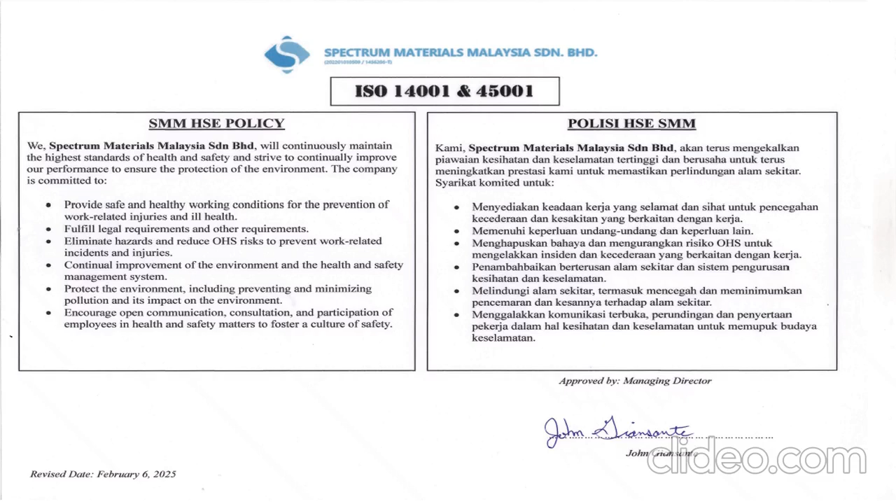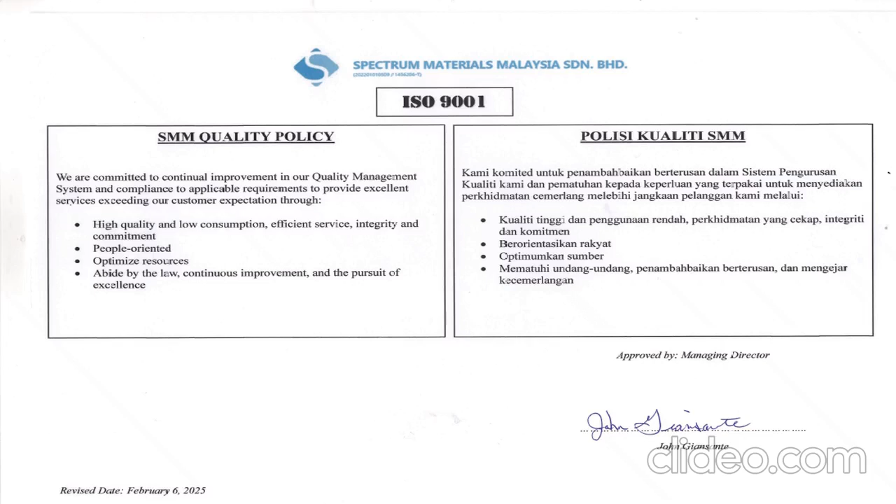Spectrum Materials Malaysia Quality Policy. At SMM, we also strive to ensure all our activities are in line with quality policy. SMM commits to secure a quality system that meets customer requirements and expectations. This is to ensure all our products and services meet stringent quality and safety requirements.

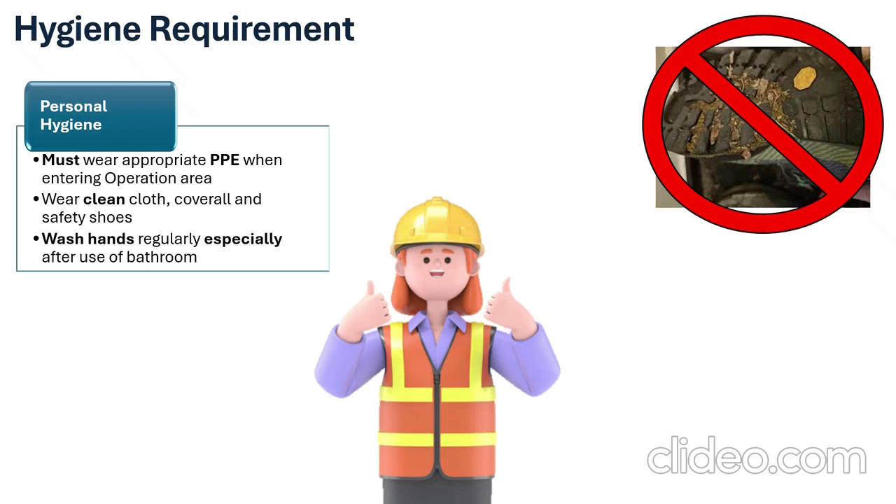Hygiene requirement. Personal hygiene. Must wear appropriate PPE when entering the operation area. Wear clean clothes, coveralls, and safety shoes. Wash hands regularly, especially after use of the bathroom.

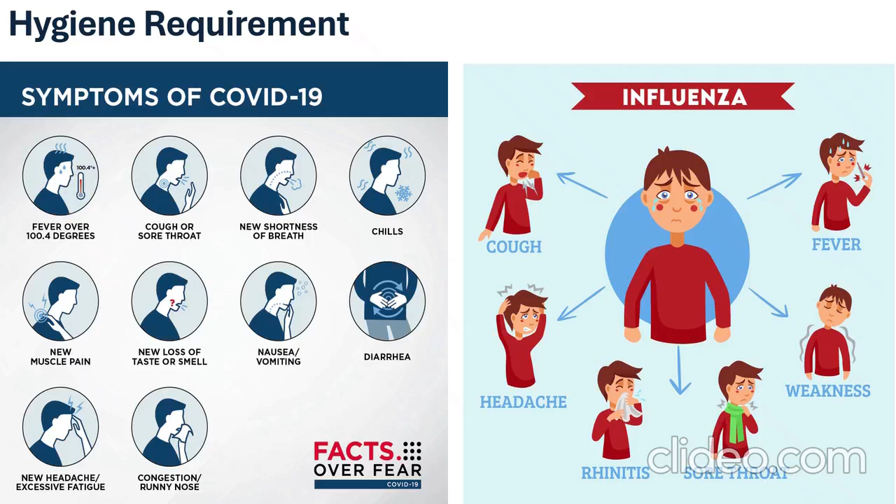Personal health. Please inform the SMM management team if you are suspected of being infected with an infectious or transmissible disease. At SMM, no food and drink are allowed, except drinking water, in operation areas.

No smoking and vaping except in designated areas. No spitting except at appropriate areas. Do not litter. At SMM, we divide our waste into two categories: domestic waste and scheduled waste.

All domestic waste can be thrown away in the regular trash can. However, garbage under scheduled waste control must be thrown away in a special trash can, or inform your host to throw away garbage under scheduled waste.

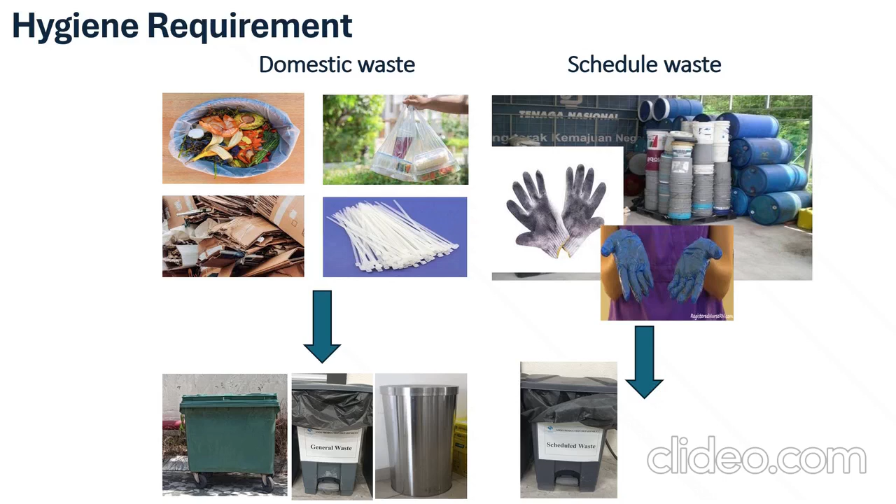Gate pass must be used for company assets. Get signature from SMM managers. Hand over the gate pass to a security officer prior to exit.

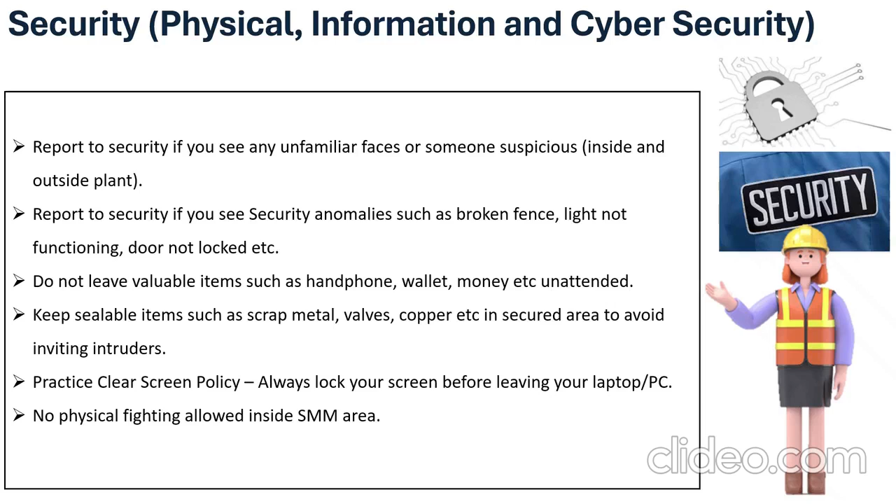Spectrum Materials Malaysia Factory Safety Rules. Security: all contractors and visitors must register at the main guardhouse.

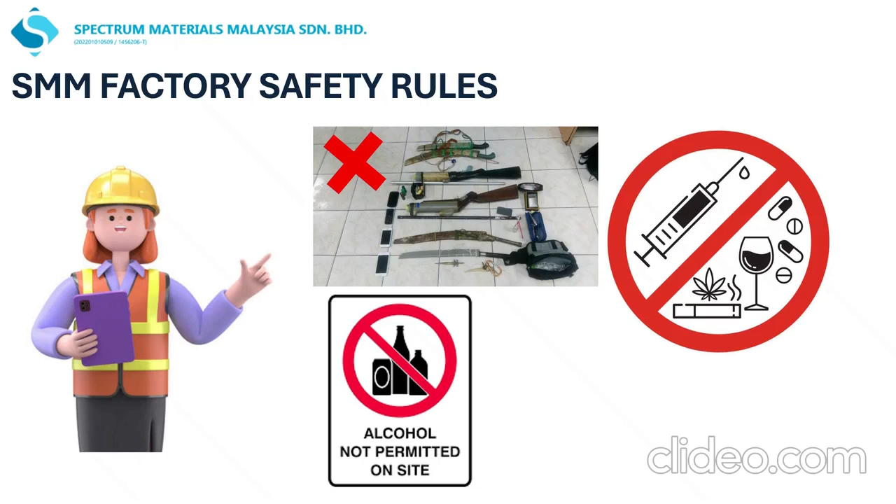Do not bring any illegal substance such as drugs, alcohol, or items forbidden by the law of the country into the plant. Photography and videography are not allowed at all areas within the plant. If you need to take any photo, please consult your host.

For contractors and visitors, do not use a mobile communication device while at the plant except using a walkie-talkie. Only employees with permission from the managing director are allowed to use smartphones.

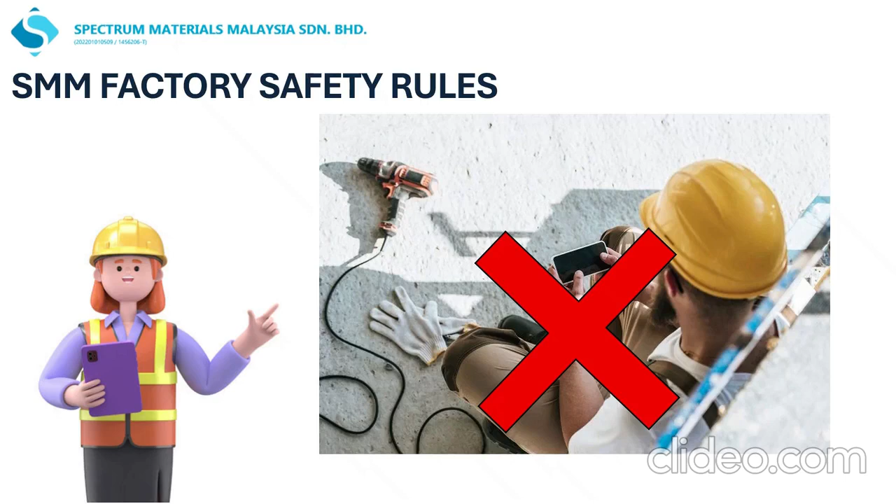Any person under the age of 18 years old is not allowed to enter the site. Speed limit for driving within the site is 25 km per hour.

All vehicles entering and exiting the plant will be subject to security check. Follow road signage and stop lines available at the plant area. Please reverse park your vehicle at the designated parking area.

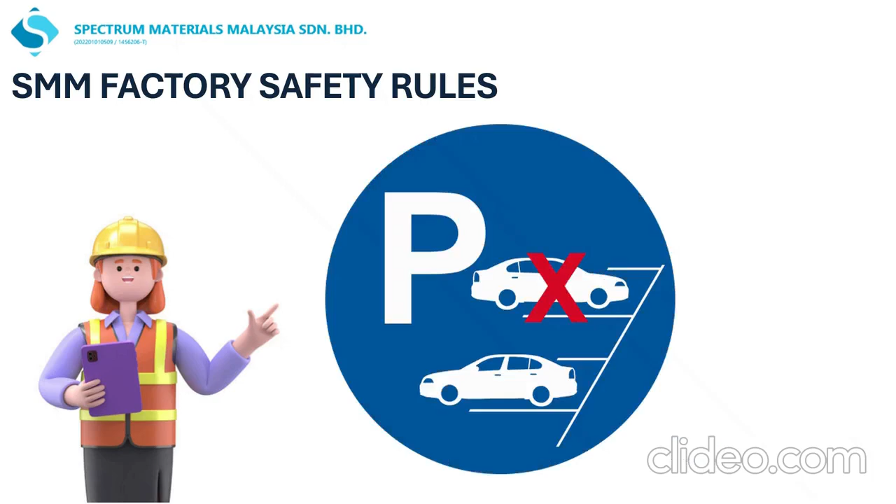Do not park your vehicle at any other area. For trucks and lorries, please ensure to install a stopper before you leave the truck or lorry. Use the pedestrian walkway at all times when you want to cross the street or area.

The use of mobile phones while walking is strictly prohibited. Please stop in a safe location to make or receive calls.

This plant has high traffic movement. Please pay attention to the movement of forklift trucks, tankers, and other vehicles.

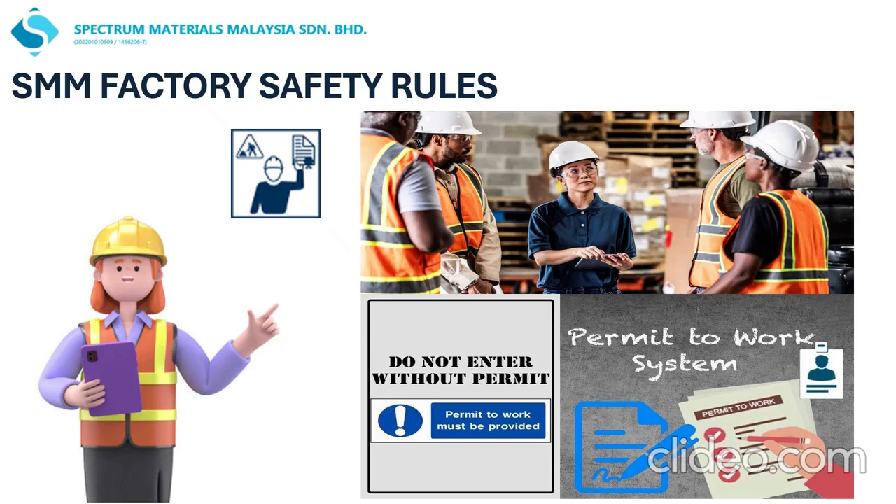For employees or contractors performing any work within the plant area, SMM's permit to work system must be followed. Only employees and contractors who have been trained on SMM PTW requirements are allowed to perform any work at the site.

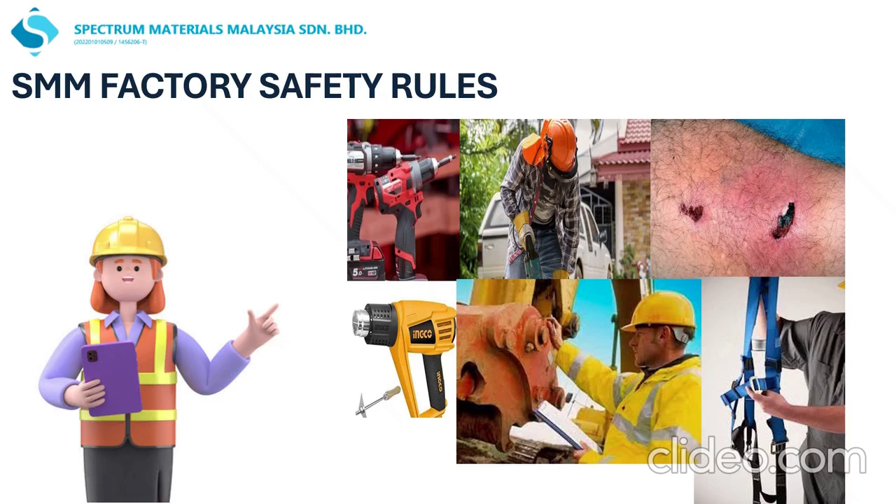All equipment, power tools, and additional PPE such as safety harnesses must be inspected by the SMM team and have a valid tag before using it. Ensure good housekeeping at all times in your working area.

Ensure there is no spillage of any chemical, oil, or paint. In case of spillage, the spill needs to be contained immediately.

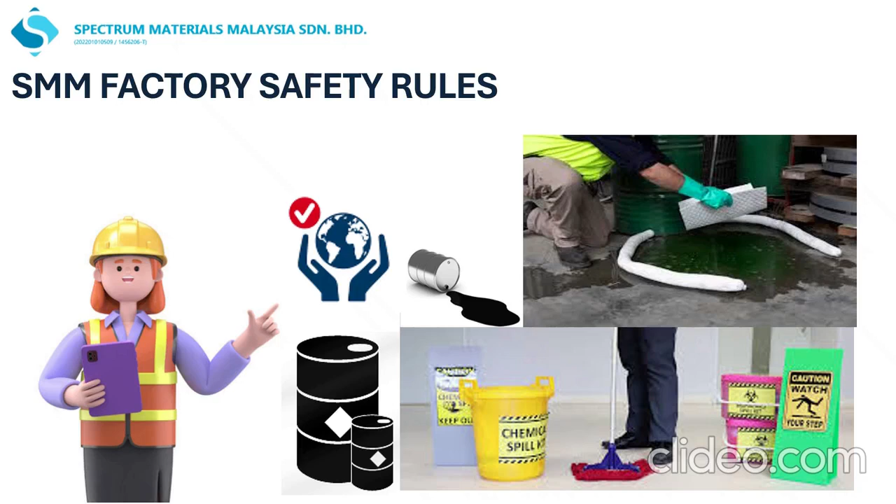For contractor vehicles such as trucks and lorries, make sure your vehicle is inspected by your company representative to ensure the vehicle is in safe condition, and that your vehicle has a minimum of emergency equipment such as fire extinguisher, first aid box, ERP manual, and emergency reflective triangle kit.

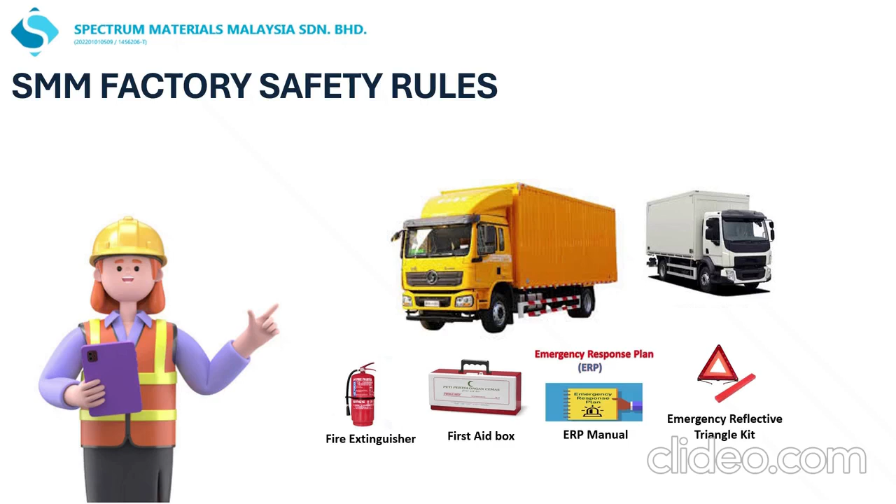If you witness any incident, near misses, or require any first aid assistance, please inform your host or any SMM employee immediately. This is the SMM factory layout.

Please note that the red line is a restricted area to enter. You are required to follow and wear minimum PPE before entering the restricted areas. Do not enter restricted areas without permission from SMM staff.

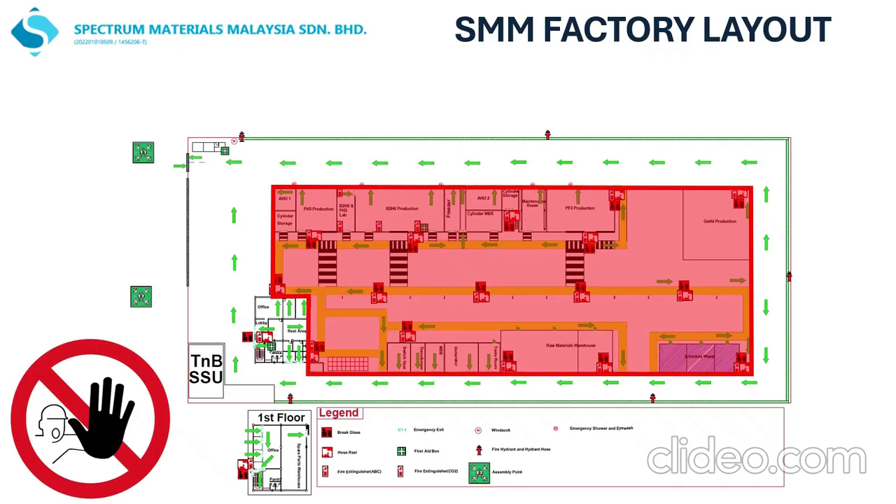Use personal protective equipment at all times while at the plant. Specific PPE for restricted area must be observed.

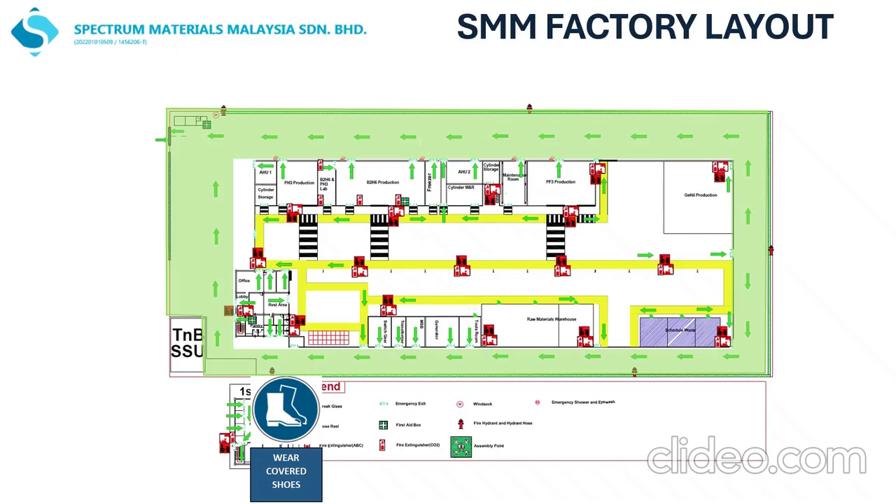Minimum PPE for all open areas within the plant including parking lots, roads, pedestrian areas, within office areas and other than restricted areas. Minimum PPE when in restricted area except inside office area. Minimum PPE when in restricted area which is inside the operation area.

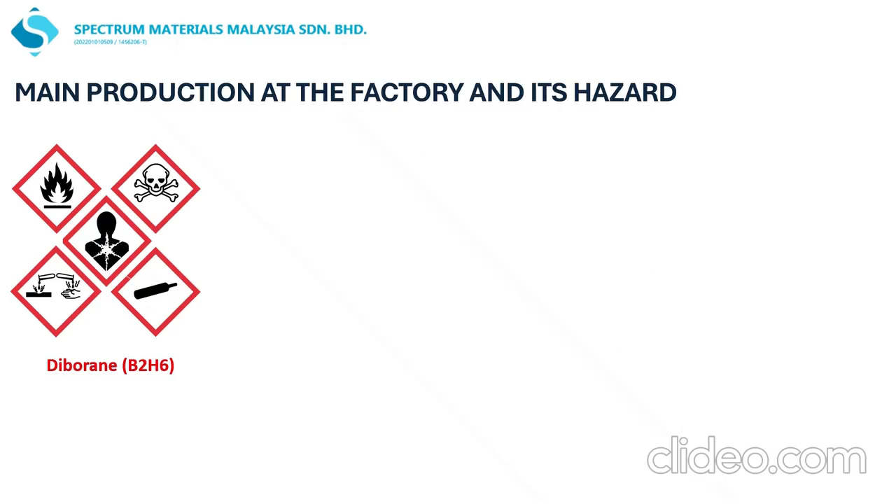Main production at the factory and its hazard: Diborane and mixture gas with diborane. Its physical characteristics are colorless, extremely flammable, and very toxic gas with a sweet odor.

Pressurized gas in cylinder. Its hazards identification are extremely flammable, risk of explosion, high pressure, may explode if heated. Can cause serious damage to eyes, very toxic by inhalation.

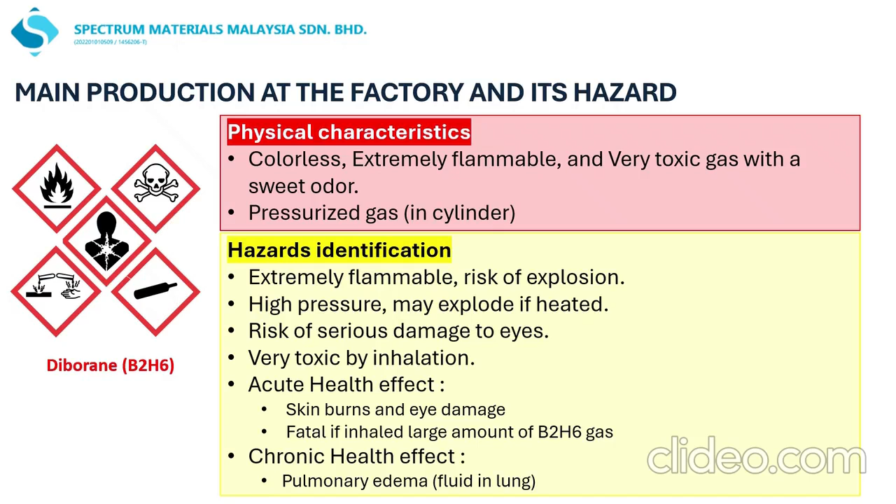For acute health effect, it can cause skin burns and eye damage. Fatal if inhaled in large amounts of diborane gas. For chronic health effect, it can cause pulmonary edema, fluid in lung.

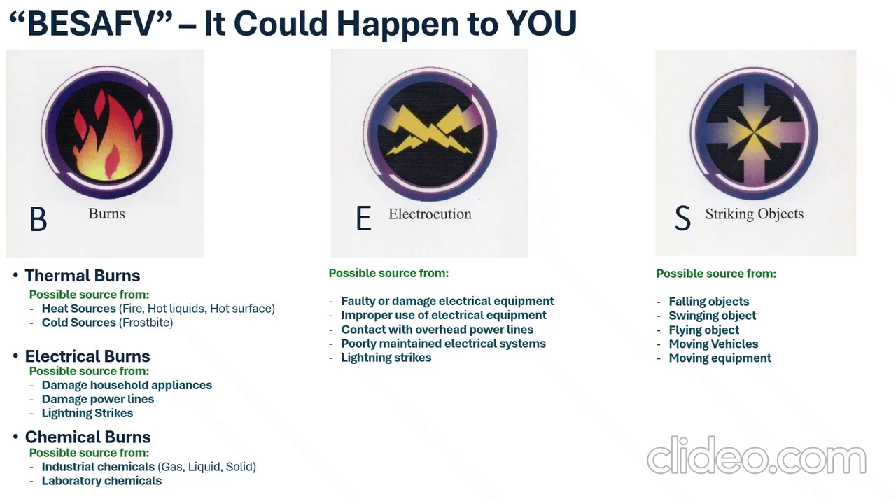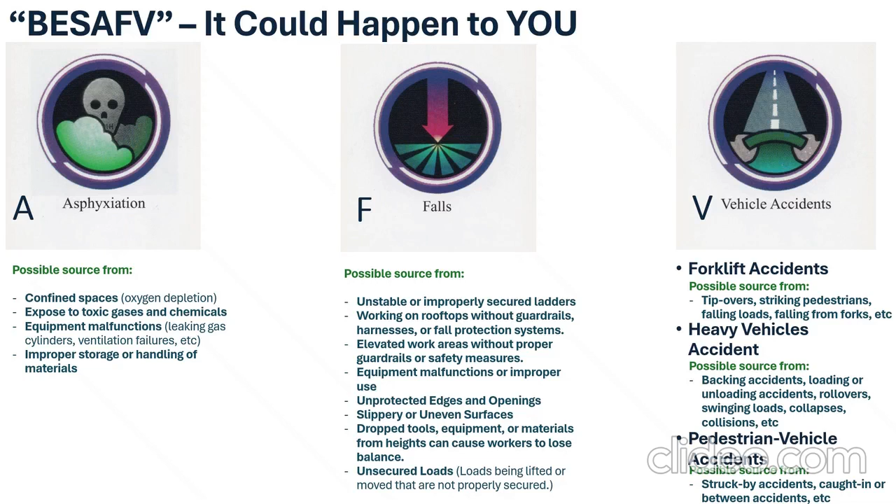The following are SMM-related risks from the hazard identification, risk assessment, and risk control that have the potential to occur at SMM factory. It is important for SMM employees and contractors to perform any task as per agreed job hazard analysis and/or hazard identification, risk assessment, and risk control, to ensure the identified hazard can be prevented or reduced, based on agreed corrective and preventive action, and to avoid the effects of the hazard to humans and the environment from occurring.

In case of emergency, a continuous alarm will be sounded. There are two types of siren: one for flammable, toxic, oxygen gas alarm. The second is for fire alarm.

If only the gas alarm is activated, personnel in the affected area must evacuate immediately, while personnel in other areas such as the office may remain calm and continue their work.

However, if both the siren and bell are activated, do not panic. Stop all your work, secure the work area if required, and all personnel must immediately evacuate the building and proceed to the emergency assembly area, which is located in front of the guardhouse.

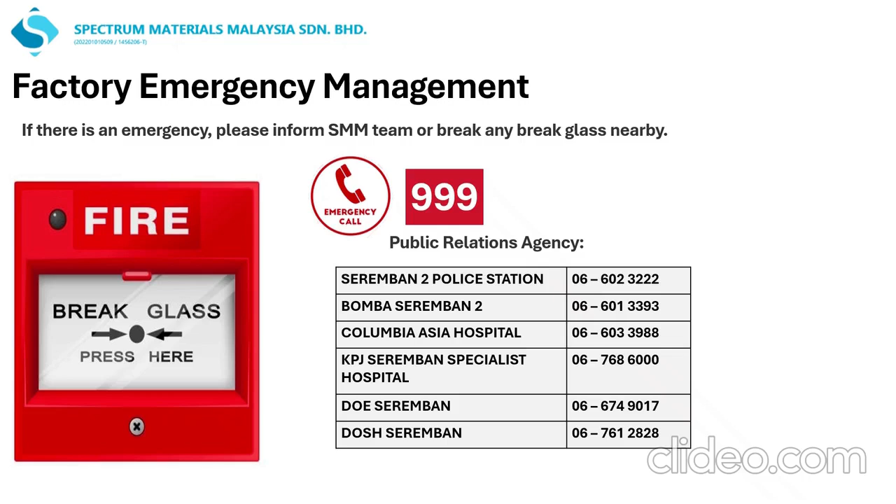Plant emergency management: if there is an emergency, please inform your host or break any break glass or manual call point nearby. If it is a real emergency, we will call the emergency number as below.

As per Section 24, OSHA Amendment 2022, employees including contractors and visitors also have to carry out your responsibilities by working together with employers and people around you to take reasonable care for the safety and health of yourself and of other persons who may be affected.

Comply with OSHA Act 1994, guidelines, safety procedures, JHA and company requirements. And wear and maintain personal protective equipment, PPE, given by the employer.

Remember, safety practices are not to be implemented part-time, sometime, and no time. But safety practices must be implemented full-time, on time, and every time, because good luck does not happen all the time.

To keep things safe and sound for you and to prevent any mishaps or losses, please remember to stay alert and follow all safety guidelines during your visit. Stay safe and enjoy your time here.